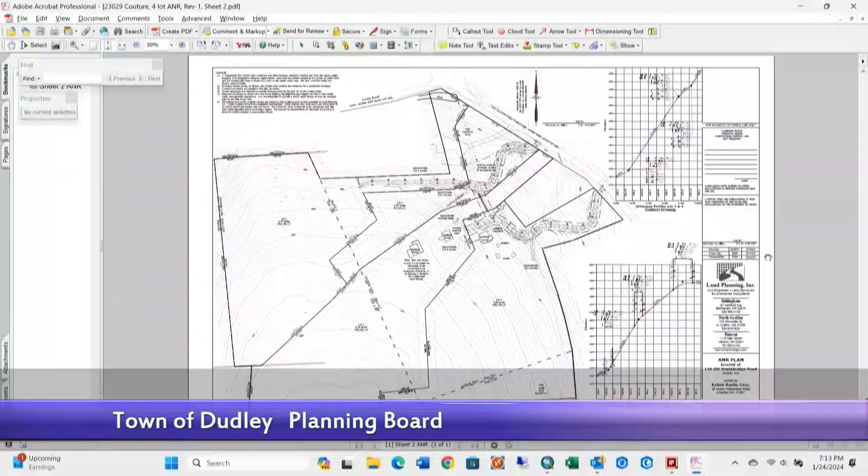Driveway for lot 3 and 4, and then this one is for 1 and 2. Are we looking at anything better than what we currently see?

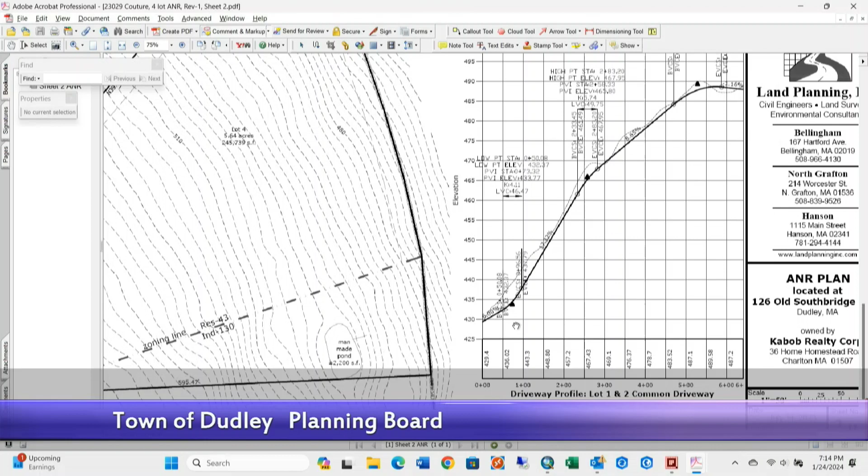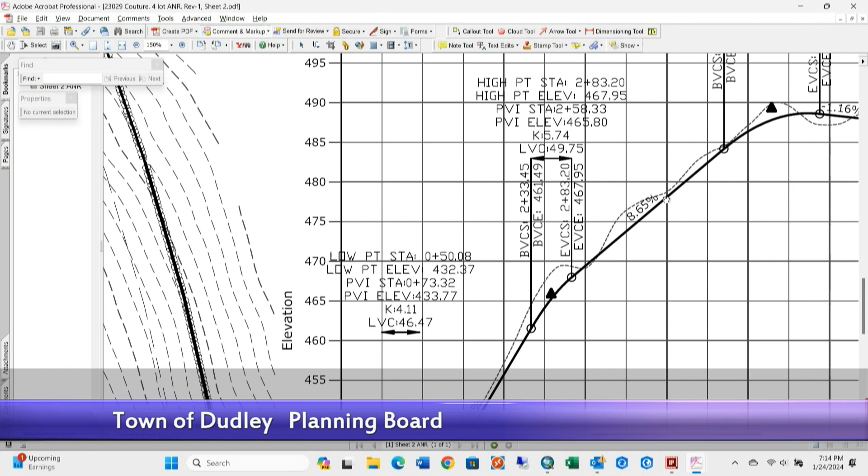Can you read the grades on there? So this had the 6% grade for the first 50 feet. Then it got up to 17%. Leveled out, then declined to about 8.65%, and then leveled out, leveled off up top. How about the other one?

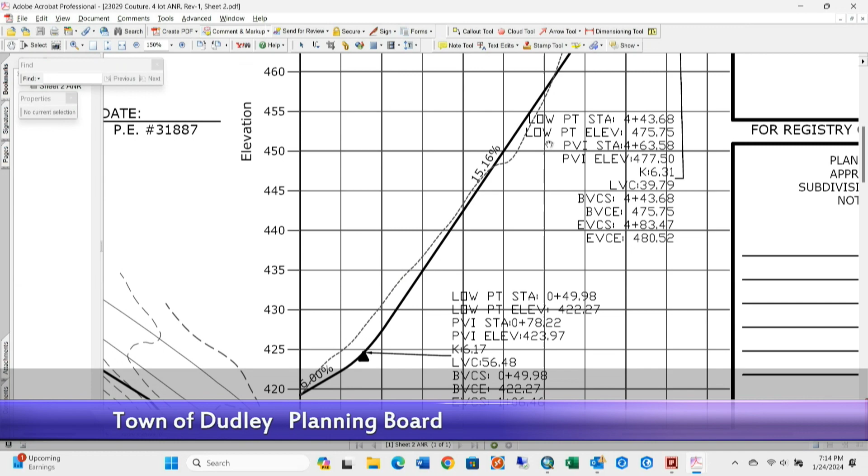It had a 6% for the first 50 feet. Looks like maybe a little bit more than that. 15% grade from that point, and then 8.84%.

So based on the two plans that we've seen, it's looking like you've got a difficult situation.

So I'll just say that all this board can do is make a recommendation, because we don't have the authority to grant the fire access. That's correct. I think that's what the zoning board was asking.

I mean, this isn't much, what you're proposing isn't much worse than what we approved, so, in my mind, I don't know how the rest of the board feels, but you're working with a difficult site, it's a steep site. So basically, you're trying to put everything into one driveway versus having two driveways to service the lots.

It would actually be 3 driveways at that point if we did it, right? Because the existing one remains the way it is, and then you would put 2 more in. So environmentally, it helps a lot, and safety-wise, you're down to 1 driveway.

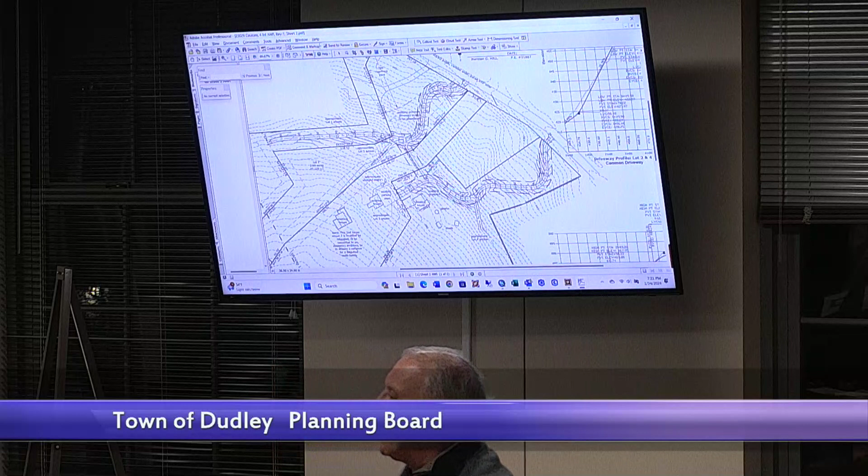Now, doesn't that other driveway take some of that 19% grade out of that? No, we just looked at what was proposed on this plan, and it's 17%. On the one on the left? Yeah.

How about the groundwater, or the surface water? Anything addressing that? Well, our engineers have made a note on the drawing that we need to look at water flow, and that's stated in the notes. From where I could see, everything that's going to be proposed up there, including the additional impervious surface, the driveway, all that rain, all that water is going to be coming down my driveway, across the road and into my place.

So, since they raised the grade on the road itself, I'm already dealing with it. I had to build a berm there already, but those last two rainstorms we had, there was a ton of silt and leaves and crap from that.

Well, you guys take pretty good care of that, I have to say, but I'm not sure how long you're going to be keeping that up. But anyway, there's a lot of water coming off of that hill, and if it's all going to be channeled down that particular driveway... it's coming off of that hill no matter what. Well, I know, I don't know if you have to cut a swale in somewhere, or if you can put in a retention pond - I know that's something the state does - but something to take the curse off it. Even if you cut a swale with some stone in it, maybe you could divert a lot of the water off to that empty lot. Just a thought.

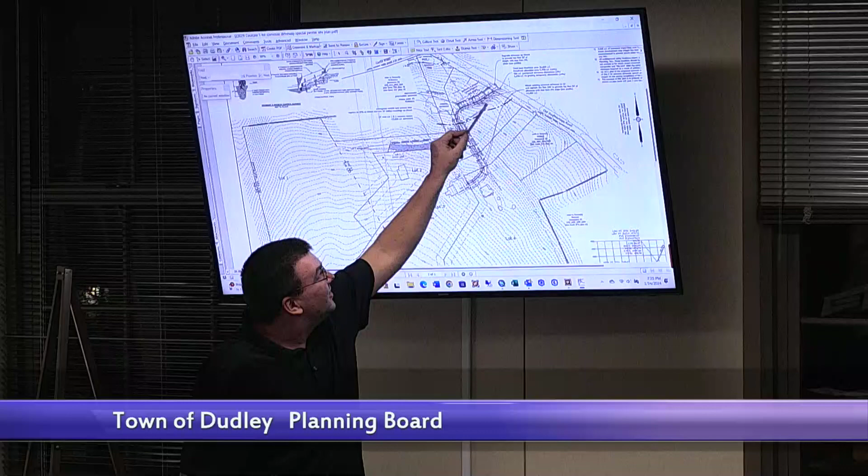The original... so the second driveway, kind of exit like you did the other one, like exit coming this way. Oh, you mean turn it towards the other house, like they did? Sure, have some vegetation there to catch water.

We have plenty of room down there to do whatever. That's what he's saying there - take it and swirl it away, and then you could direct it down. He's talking about rolling it this way.

Into the woodland lot? So the recommendation - here's the existing driveway. What he was recommending is that we roll it this way, which would be crossing the front of your house, rather than putting a straight swale into the driveway, or something there to catch the water.

You still have - I didn't write the bylaws, but I assume they were there for a particular reason. There is no bylaw. I mean, two houses on a driveway? Mr. Chairman, to the planner, as far as I'm concerned, the subdivision rules and regulations do not apply. Correct, the only thing in the town bylaws is reference to the zoning board of appeals. So effectively, there is no bylaw.

This is one of the big holes we tried to plug at a previous town meeting and didn't get anywhere with it. Quite honestly, my hackles come up when you say common driveway. What is a common driveway? That, in my estimation, approximates to a private street in Worcester, and you've seen the condition of some of those over the years. This would not be accepted by the town. This is what it is - when it's done, day one is as good as it's gonna get. After that, good luck.